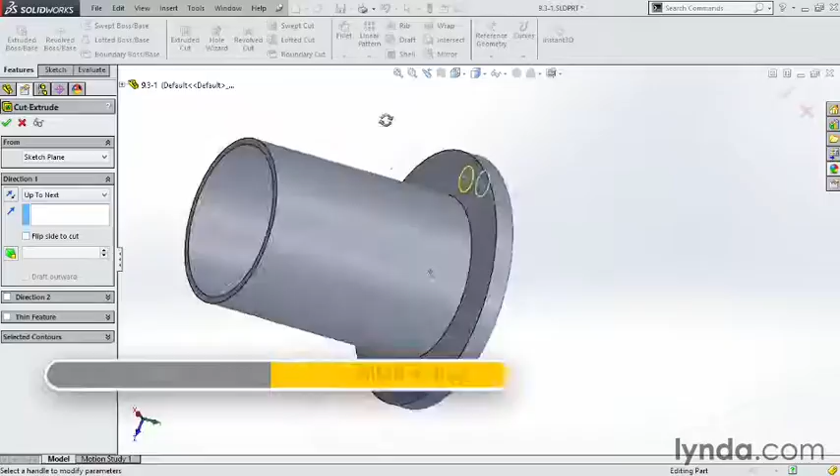hole. So let's start off by cutting that hole, and you can go up to extrude cut, and let's go ahead and say extrude cut up to next. So it's going to cut through that flange. Click OK, and there's my hole.

Now I could have gone back to that sketch right here, and I could have done a circular pattern by clicking on the drop-down arrow, circular pattern, and pattern that little hole all the way around here. That would make a very complicated sketch, so I prefer not to do patterns in sketch mode, and I'd rather do it on the feature level.

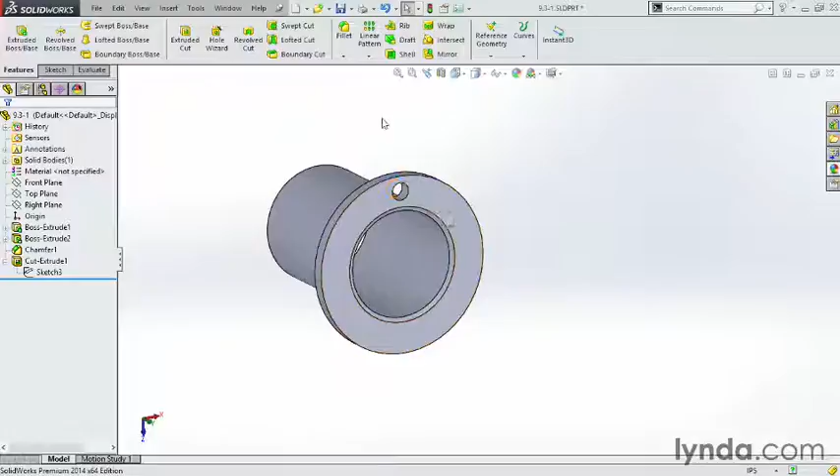Now I have this cut, I can come up here to directly under linear pattern. If you click on the drop-down, is circular pattern. Now it asks me, number one is, what do I want to revolve around? I need some type of central axis, or you can pick an inside face. That will allow me to pattern around that face, and then click on the features to pattern. In this case here, I want to pattern that cut extrude 1.

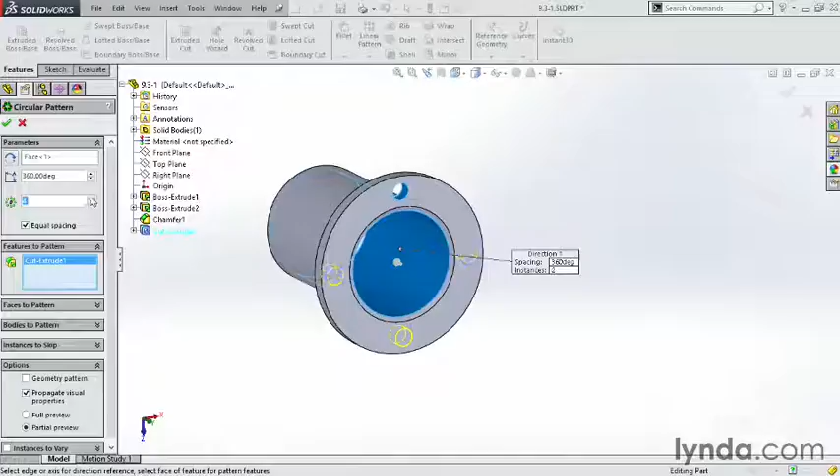Notice as soon as I do that, it automatically gives me a spacing or a layout, and I can change this number up or down depending on how many bolt holes I want all the way around that pattern. So it makes it really easy to update and change this as needed. So let's go ahead and put 12 and make it go through 360 degrees and make sure we're patterning this cut. Click OK, and there it is.

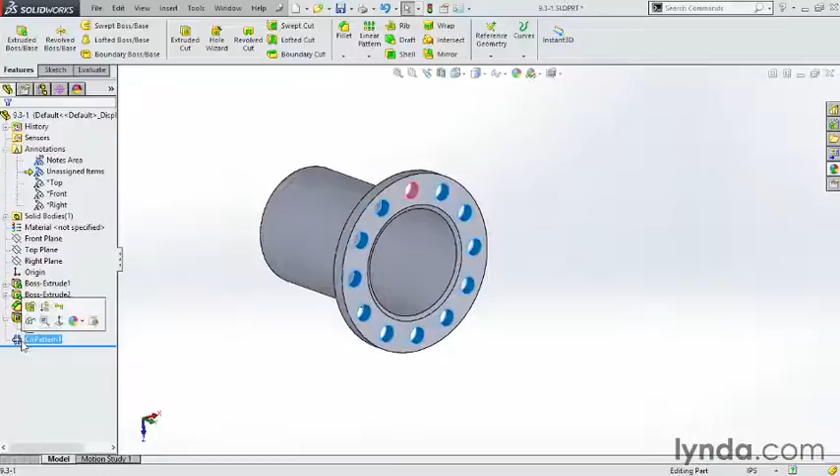Really simple. The other great thing about using a circular pattern is it's very easy to change. If I want to change this, go ahead and click on circular pattern, open it up, change how many degrees you're going to be patterning through, maybe change it to 180, and this time I only want 6. So you only have 6 holes on one side of the part. Quickly change it from one to the other, no big deal.

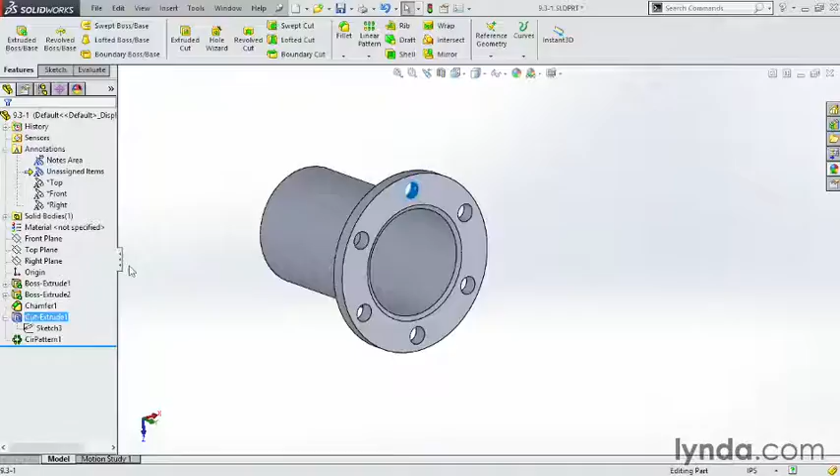If I want to change it back, go back over here, change it back to 360, and we'll leave it at 6 for right now, click OK. Now if I want to change the hole, for instance, easily go back, change that sketch, change the size, let's change it to 1/2 inch, so 0.5, click OK, exit out of that, and then the pattern automatically updates with the new hole size. This is a really great way to utilize a very simple cut and a pattern to get some pretty complicated shapes.

The circular pattern is by far my favorite feature in SOLIDWORKS. It is simple to use and the results are awesome. Play around with the various combinations of instances and angles for simple bolt holes or wild creative patterns.